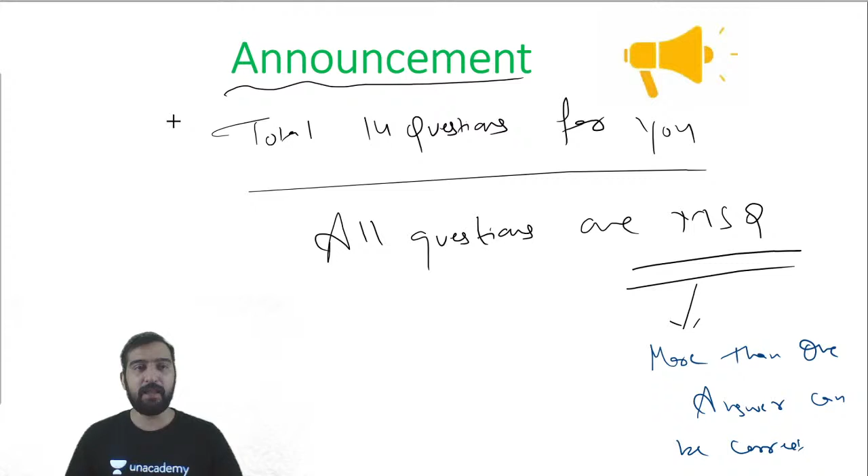All questions are MSQs. MSQ means in all the questions more than one answer can be correct. In fact minimum 1 answer will be correct, 2 can be correct, 3 can also be correct, even all 4 can be correct. So this is the concept of MSQ. What are the advantages of MSQ? No negative marking in GATE, no negative marking.

So these are our advantages. What are the disadvantages of MSQ? No partial marking, no partial marking. Suppose if in a question B and C are correct, and if you have ticked only B option, then my dear friend you will not get half of the allotted marks. You would be getting zero. No negative but no partial marking as well. So your concept must be very sound in order to attempt such questions.

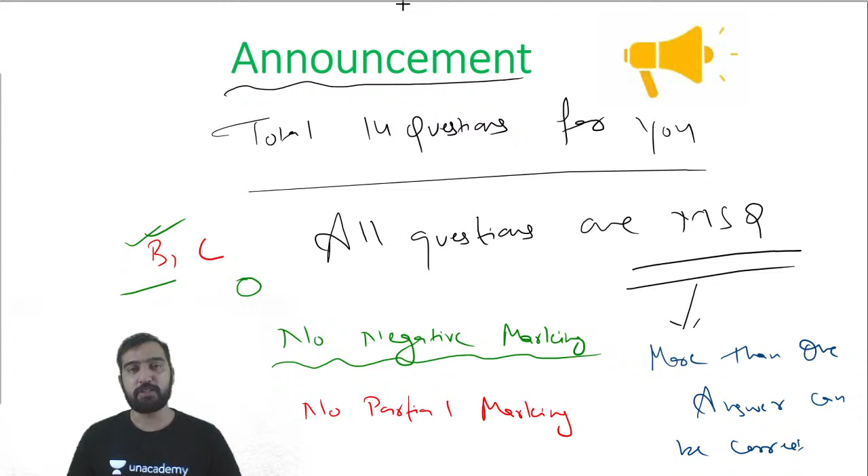So to practice this, I have come on the subject of RCC as well as strength of material. So my dear friend, welcome once again to the MSQ session on RCC and strength of material, and I think we should start the session now.

Only this much audience is there. Where are the others, my dear friend? Only 13, 2 less. Good morning Vamsi ji. So shall we start the session?

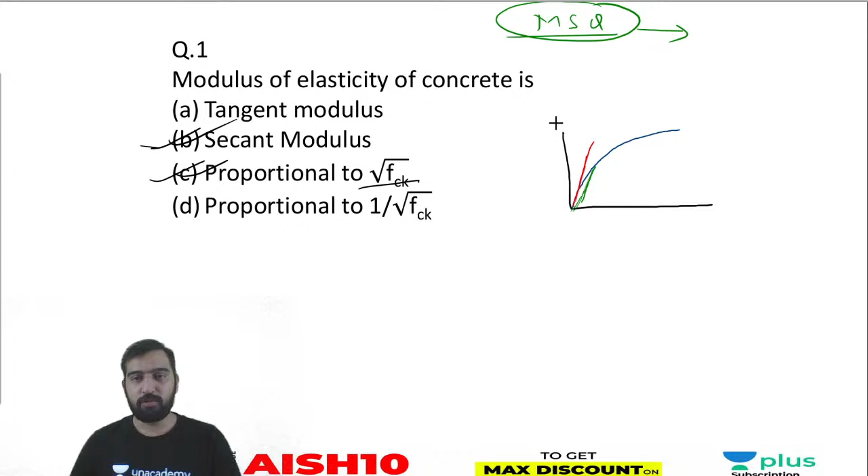So my dear friend, most of you are correct that the modulus of elasticity of the concrete depends upon the secant modulus and it is proportional to under root FCK. There are 4 types of moduli based on the stress strain curve - what are those? This is initial, this is secant, this is chord, and this is tangent. So out of these 4, IS code has taken secant modulus, and by considering the effect of creep and all, EC has been given as 5000 under root FCK. So IS code has taken secant modulus and EC is directly proportional to under root FCK. So both option B and option C are correct, my dear friend.

So now question number 2. Guys, for those who joined late, let me explain the rule again. These are MSQ questions, okay, more than one answer, more than one option can be correct. You will be getting the entire marks only if you have selected all the possible right answers. So keep this thing in mind and try to think positively for all the options. Read every option and judge whether it is correct or not. If this were an MCQ question, then I would also tick only the best one.

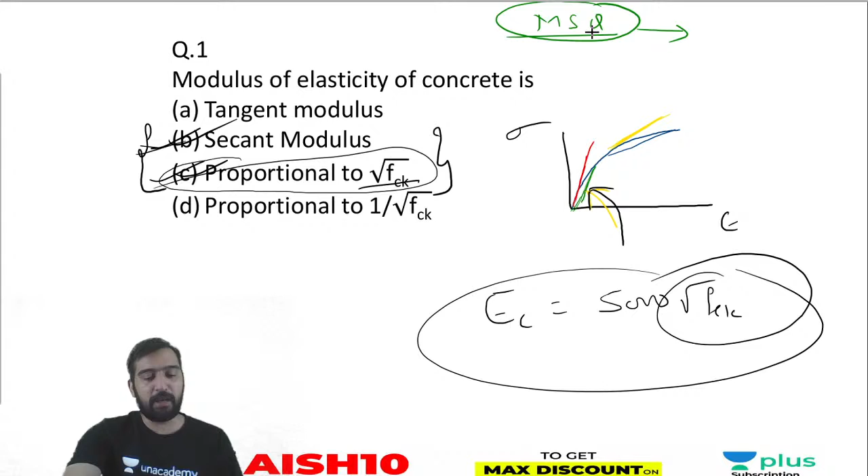Okay, not an issue. Next is question number 2 on your screen, my dear friend. So which of the following statement is or are correct? Tell me. The limit state of collapse is defined as the acceptable limit of stresses in the material. The limit state is one that ensures adequate factor of safety against collapse, and in limit state design method, actual stresses developed at collapse differ considerably from the theoretical value, and the fourth option is none of the above. Okay, so select the right one, my dear friends, select the right one.

So total 14 questions are there for two marks.

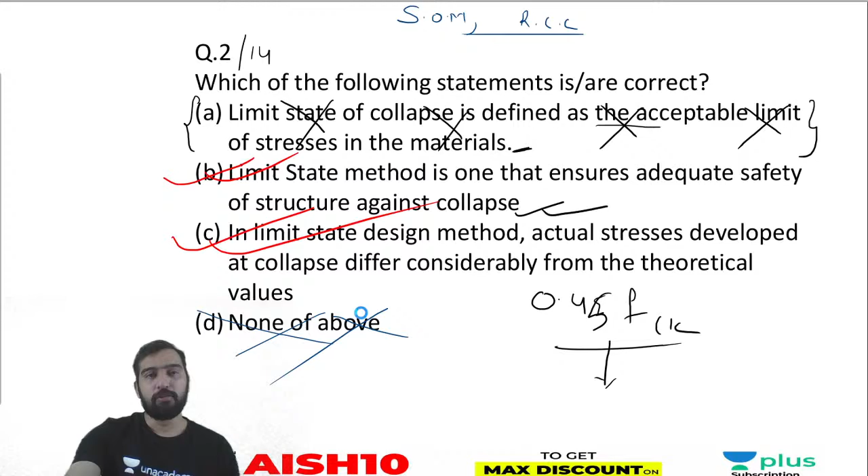Shubham, okay, so now here is question number 3. This is from strength of material. This question is from strength of material. So let me write here, question number 3.

Okay, this is an interesting question, from the very beautiful concept of strength of material, which is shear force diagram as well as bending moment diagram. So what all are the things which are correct here, that you have to tell me.

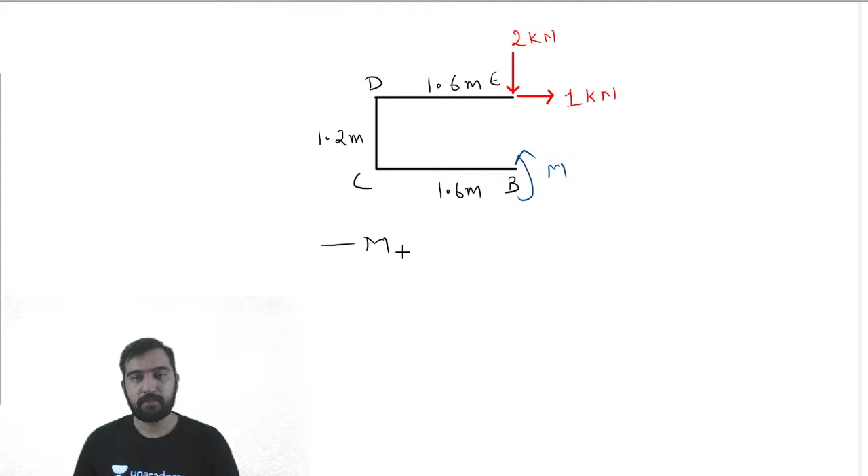EDCB. So minus M plus 2 into 0 plus 1 into 1.2 is equal to 0. So M is equal to 1.2.

It is not equal to 0. So this statement is incorrect. So bending moment at A is not equal to 0. In fact, it is equal to 1.2. Is it clear to all my dear friends?

Okay, next is maximum bending moment in AB portion is 1.2 kilonewton meter. Let's check that. So how we can find the value of maximum bending moment? That is important to know.

Now these three forces can be carried over to this support. So these three forces can be carried over to this support. And how to find these?

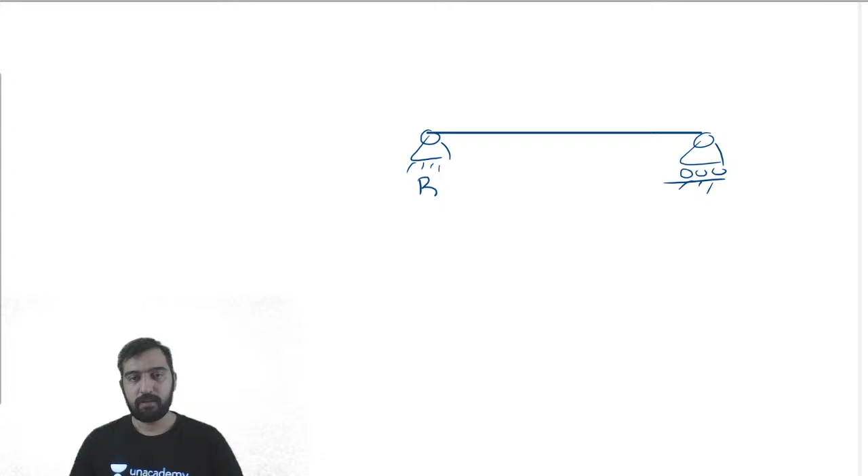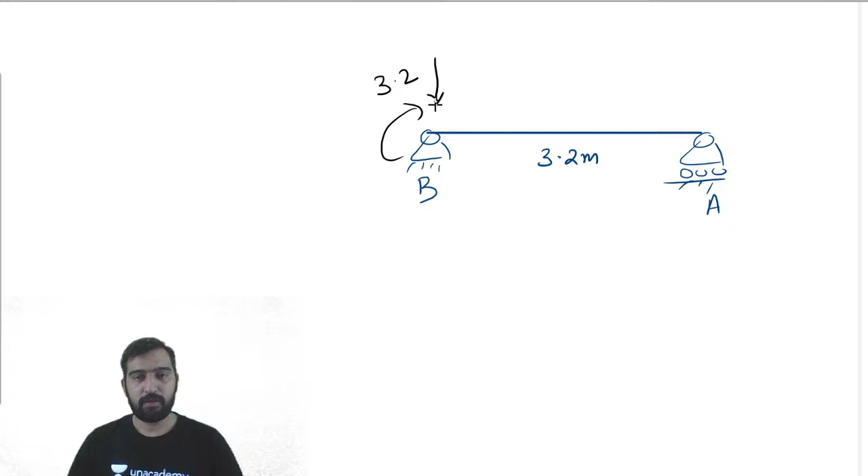This is anti-clockwise M. So carry over here would be 3.2. It would be 2 kilonewton. It would be 1 kilonewton. So if I want to write RA here, then RA is going to be equal to...

Surprisingly, no one even has attempted this question. I do not know the reason. Attempt toh karna chahiye tha na ye, ya mere comments update nahi ho rahe hain?

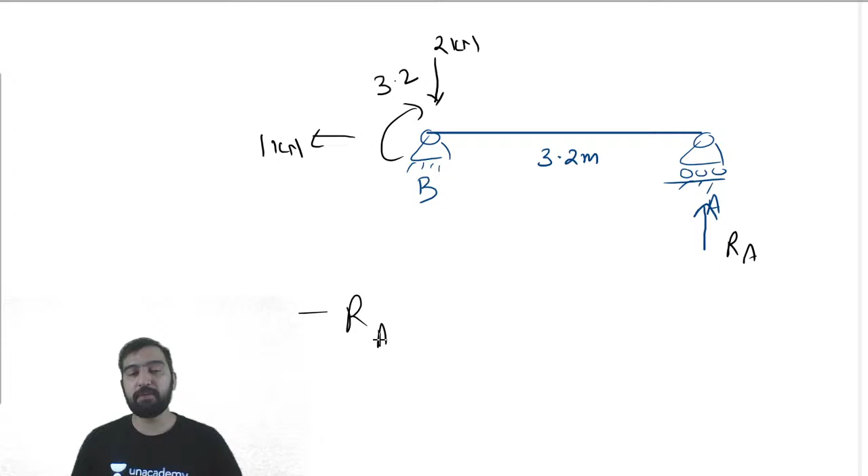So RA is 12/32, 6 by 16, 3/8. Haan na, 4 3 hamara 4 8 32, theek hai, 3/8. So this is 3/8. So 3/8 into 3.2 is how much? 1.2. So sahi baat hai.

Maximum possible bending moment in AB is 1.2. So this statement is also correct. C is also correct, theek hai.

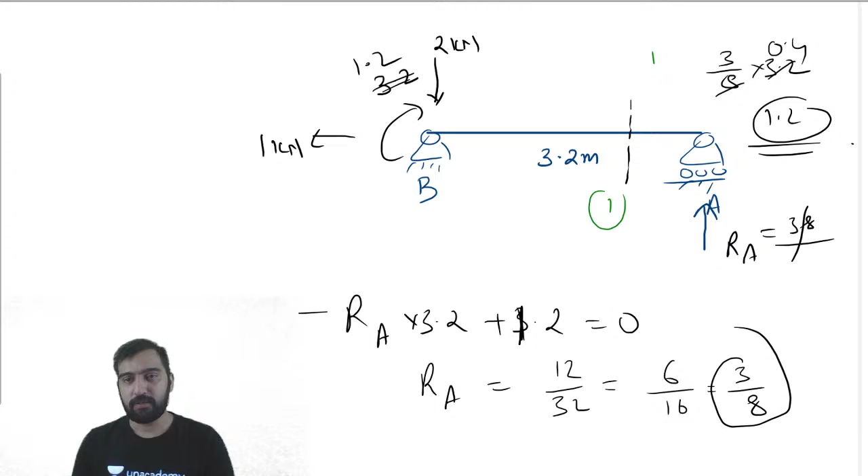The shear force in AB portion is constant and is equal to 0.375. Yes, you can see here, what is shear force here? Shear force here is constant and it is equal to 3/8.

So what about 3 by 8? 3 by 8 is I think 0.375. Okay, so 0.375 hi hota hai na, 3 8, 8 ya 24, na, 8 6 48 8 7 56.

Yes, 375 is correct. So option number A, C, D are correct and B option is not correct. Haan na, thoda bada question tha.

So please tell me my dear friends who all are agreeing with me. A, C, D - kaun kitne log agree kar rahe ho? Tell me my dear friends. A, C, D is the right answer. Okay. Chaliye.

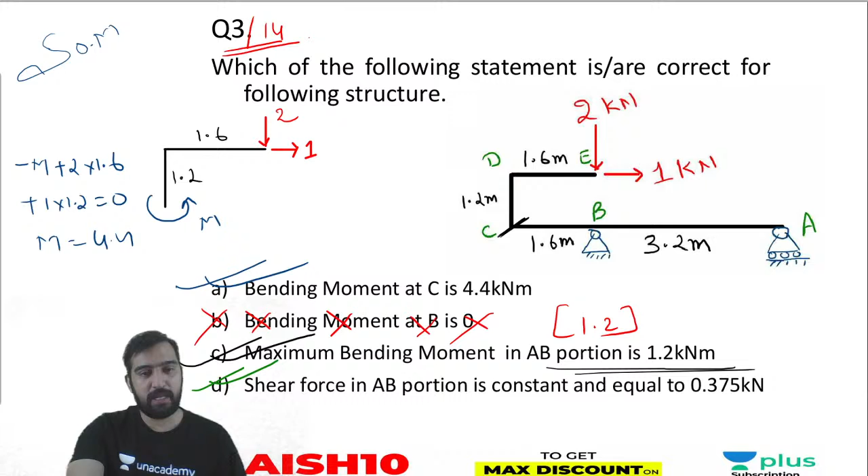So now the next one is question number. Okay, Shubham is saying A, C, D. Okay, Govind had said A, B, C. Unfortunately, that is wrong, my dear friend.

So now the next question on your screen. Question number 4 of 14. So which of the following statement is/are correct? It is again from the strength of materials. I hope it is easy to answer.

Shubham Tiwari is saying ADB. ABD, okay. What about others, my dear friend? Participation is not up to the mark. You are around 20 numbers and I am getting response only from 1 or 2. This is not acceptable, my dear friends. Interact nahi karoge toh kaise maza aayega?

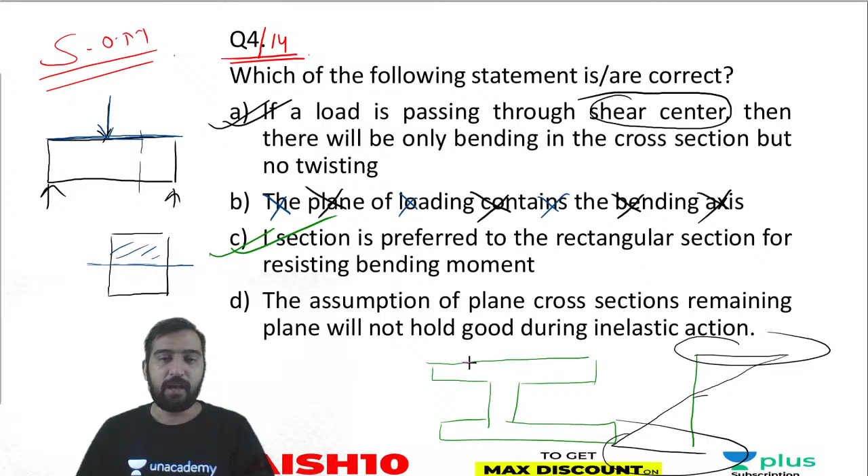My dear friend, I section, due to the wide flanges - as you all know, if we are drawing the bending stress diagram, bending stresses generally have extreme values at the outermost portions. So if outermost portions have wider availability of material, such a section would be very efficient in resisting bending moments. That is the reason why I sections are preferred more. Relatively, you are saving this much material here.

Although there are some challenges of shear stresses here, we can eliminate that by providing some stiffening girders etc. Okay, and the assumption that plane cross section remains plane will not hold during inelastic action - inelastic meaning plastic action.

This is again incorrect, my dear friend. Even in plastic analysis, we are assuming the same thing, that plane section before bending will remain plane after bending. So I tell my students that this assumption is not specific to SOM, RCC, or steel - it is an assumption of BTech civil. Throughout BTech civil, this theory will always remain valid, that plane section before bending will remain plane after bending. It means the strain diagram is going to be linear.

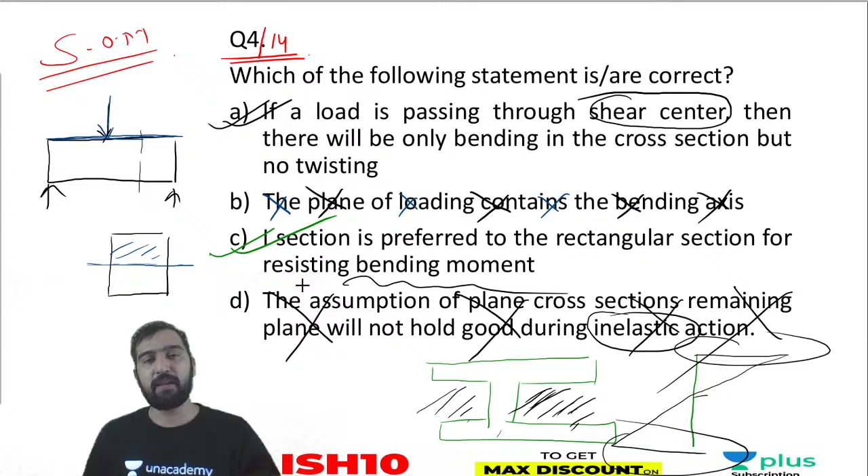Okay, so now question number 5 of 14.

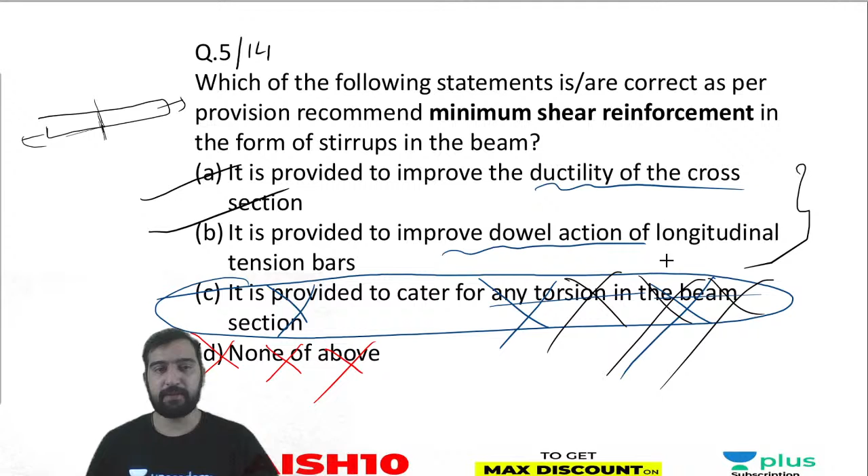Now next, question number 6 out of 14.

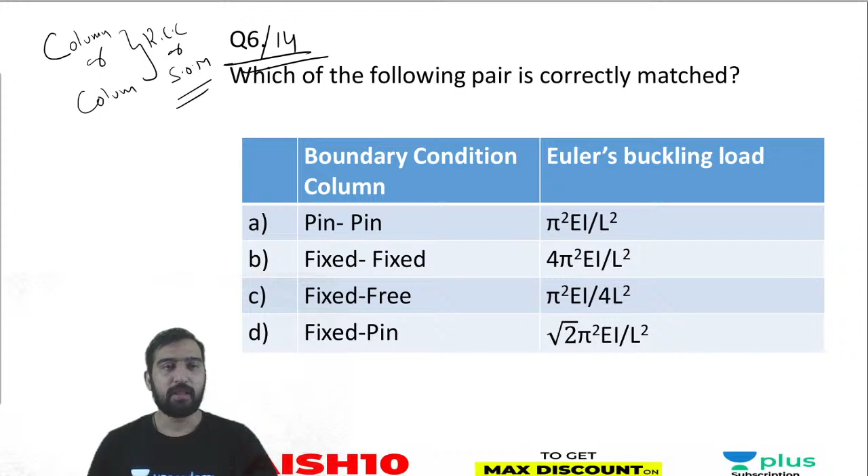Okay Rahul, take it. So which of the following pair is correctly matched? You can consider either RCC column or column from Strength of Materials - whatever you like. But I would prefer to keep it under Strength of Materials, since that would be more basic. So you have to tell which pairs are correctly matched: A, B, C.

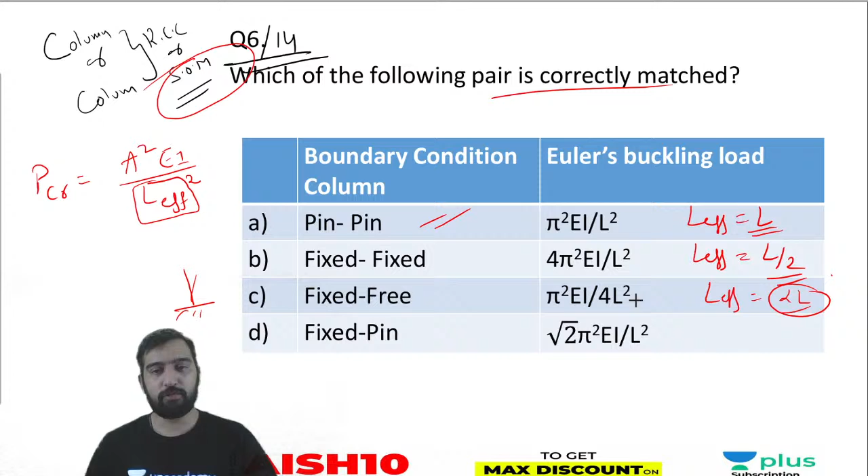Fix-pin - here L effective is your L/√2. But my dear friend, the ambiguity is here.

For L/√2 to be valid, there must be a 2 in the numerator - if it were 2 pi square EI upon L square, then you could write it as pi square EI upon L/√2 whole square. You could write it that way. But it is already √2, so this root is simply there to confuse you guys. So this is incorrect.

So all these three remaining are correct. So Rahul, Shivam and Bharat Mishra are right for these questions, my dear friend. Okay, now question number 7.

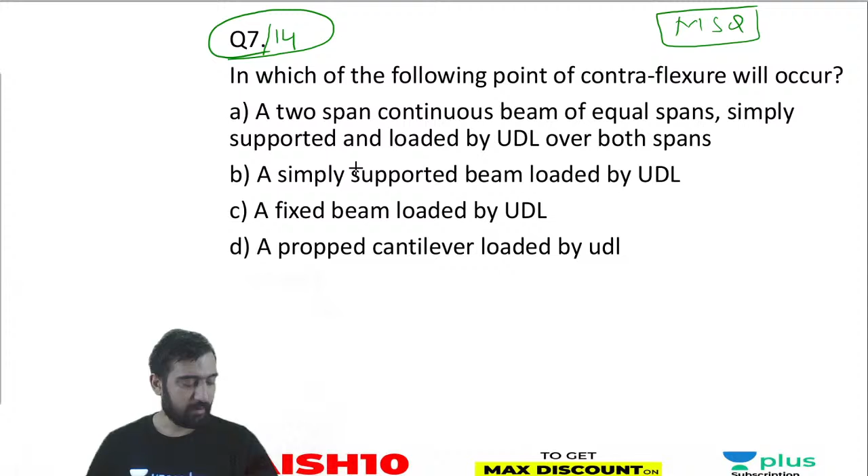Okay, so far one of you is correct. Yes, Ajay Khatri. Yes, my dear friend, Ajay Khatri is right so far. ACD is the right one.

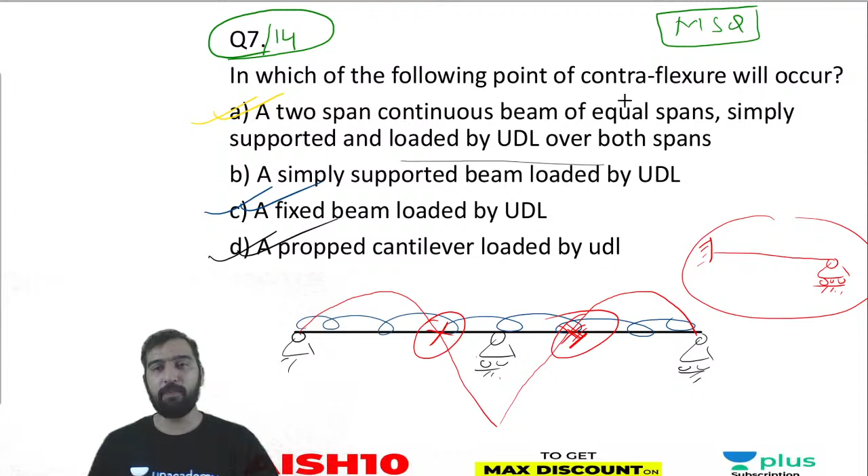Ankur Aman is saying BAD. No Ankur, if you said CAD it would sound better. So there are two points of contraflexure. I can see one here and one here. So in which of the following does the point of contraflexure occur? It is occurring in A.

Okay, a simple support beam loaded by UDL. If it's a simple support beam, my dear friend, contraflexure is the point where the bending moment changes sign. Do not think that zero is simply equal to contraflexure. Here this is not contraflexure, this is not contraflexure.

Contraflexure means the member goes from sagging to hogging or hogging to sagging. So they are positive and negative, negative and positive. So two changes you can see here over this span. So two contraflexures are here, zero contraflexures are here.

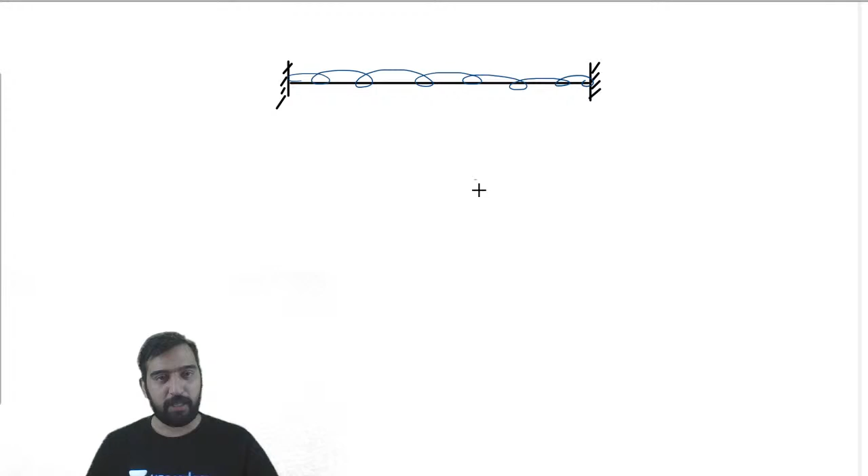Now if a fixed beam is loaded with UDL, in that case what can you do? Please do not be confused by the names. Fixed means by default it is a fixed beam. Propped cantilever beams by default have one side fixed and another hinged. Cantilever beam by default means one end is fixed and the other is free. So if you are going to draw the bending moment diagram here, my dear friend, you have to plot it like this.

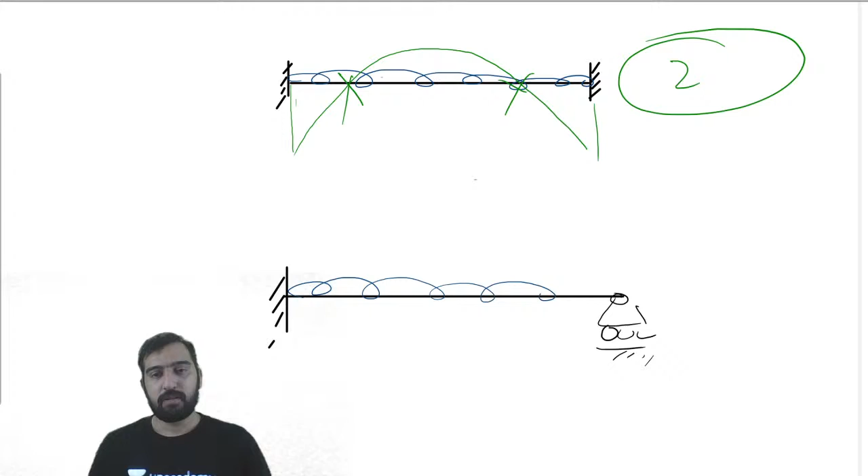So here as well you can see two contraflexures are there. And even if you are talking about a propped cantilever beam, which is again loaded with UDL, then it is going to have one contraflexure, like this. One contraflexure. But simple supports are the support which does not have any contraflexure.

So A, C, D - all three possibilities are correct. This one is incorrect. I hope it is clear to you guys. So this is about question number 7.

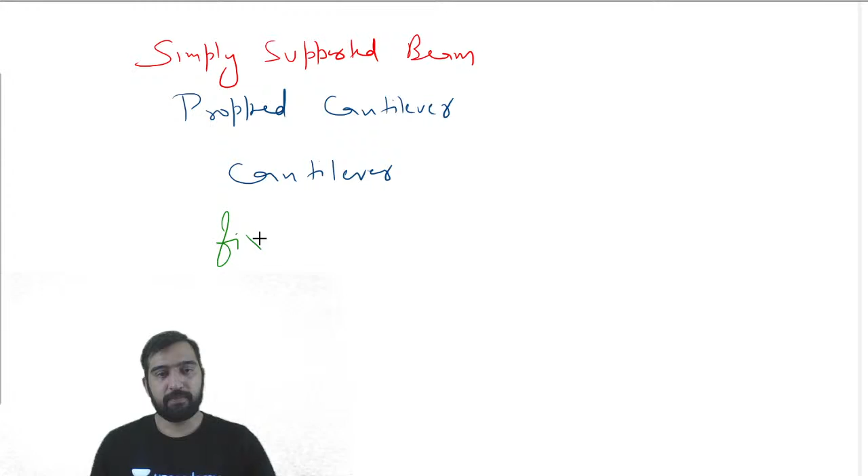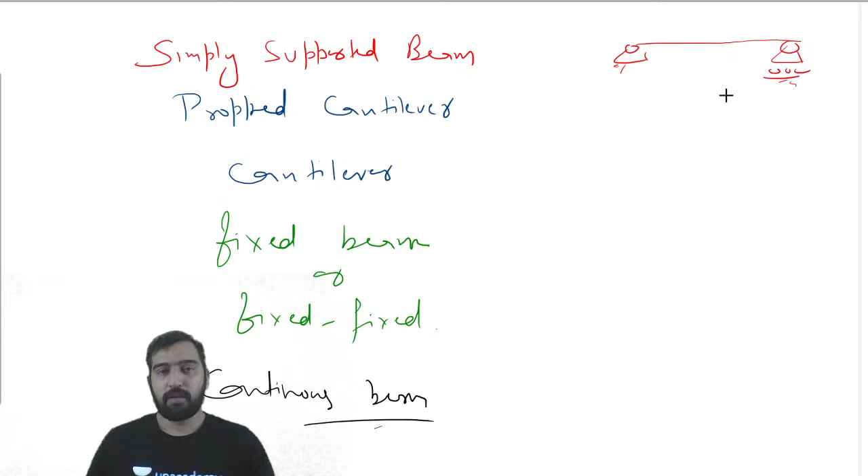Propped cantilever means one end is fixed and the other end is not free - it is propped, that is why it is called propped cantilever. Cantilever is like one chhajja, one end free. Fixed beam or fixed-fixed beam both have the same meaning, because this is cantilever, this is propped cantilever, this is simple support. So fixed beam means both sides are fixed, having fixity. Continuous means more than one span, like here.

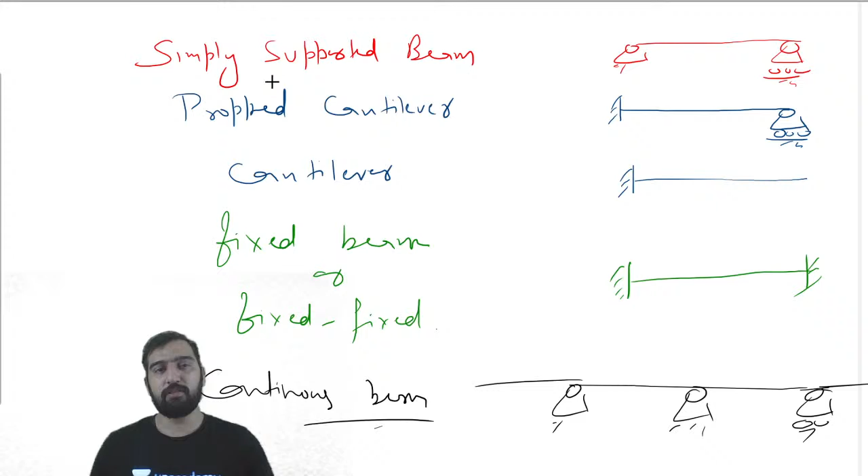And in these conditions, if it is continuous, it will go like that. Okay, so all these are the default meanings of these names, right? Tell me, I've expanded the structure topic fully on YouTube, and still you're having these doubts now?

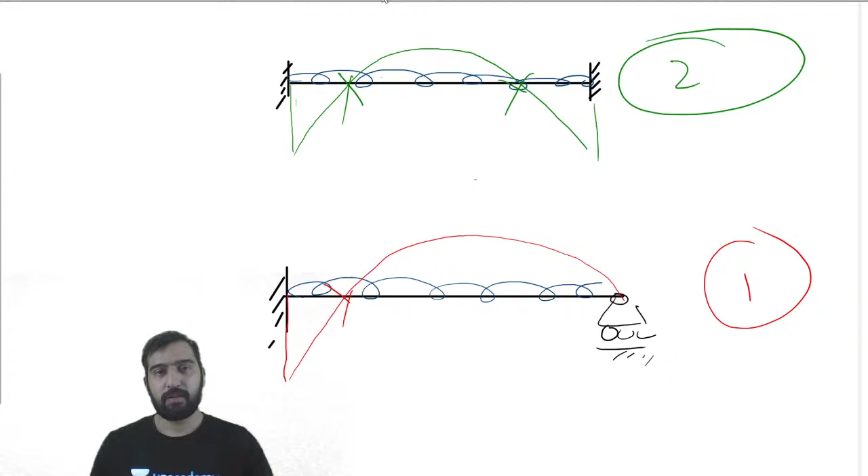Okay, so now question number 8, out of 14. It is from RCC. Yes. If it is overhanging on both sides, you have to call it an overhanging beam. You have to call it overhanging beam. Then you have to call it overhanging beam.

Okay, let's move to the next one. The bond between steel and concrete is mainly due to - is it mainly due to mechanical resistance, pure adhesive resistance, frictional resistance, or none of these?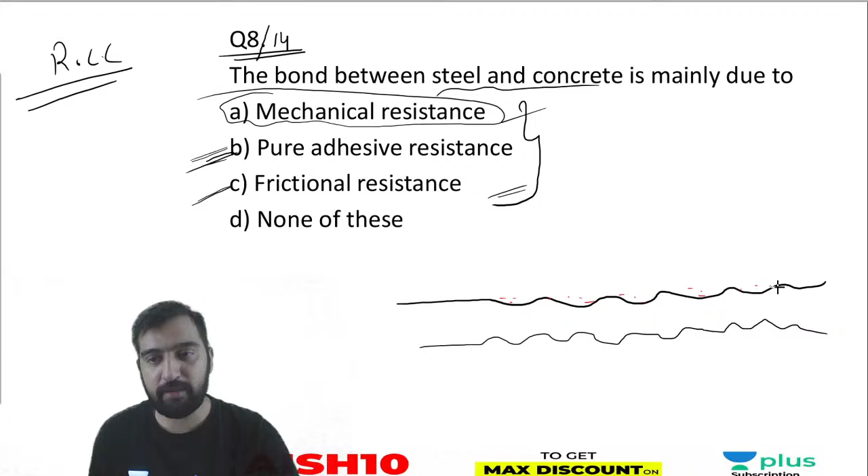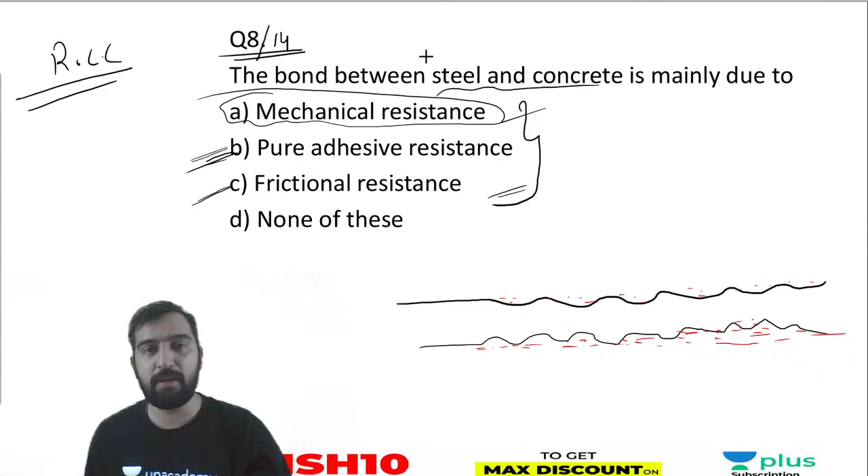Yes, mechanical resistance like in hooks. No, my dear friend, mechanical resistance is due to corrugation. Mechanical resistance, my dear Ajay, is due to corrugations. So see, whenever you are talking about HYSD bar, then you have to increase the bond strength by 60%, that is the reason. So due to these corrugations, my dear friend, what is actually happening - this ultimately helps in improving the mechanical resistance.

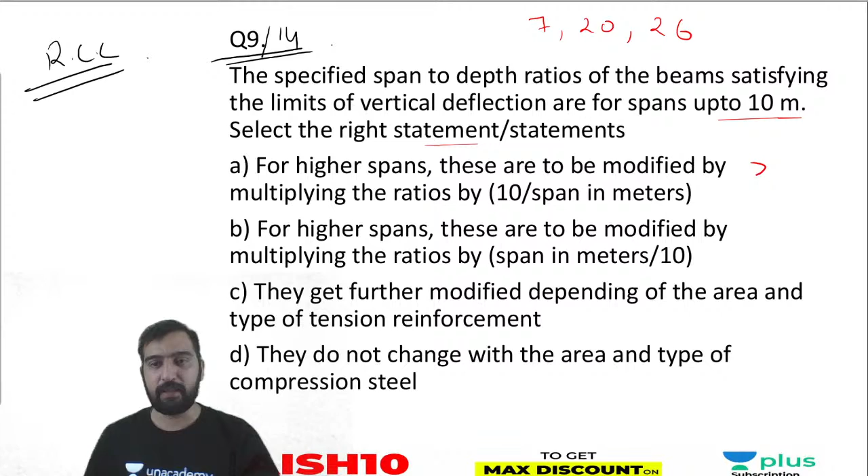Thanks Ajay. So for higher span these are to be modified by multiplying the ratio by 10 by span in meter, right. If my span is greater than 10 meter, in that case we have to multiply our ratio by 10 over span.

But yes, one thing is there - if span is greater than 10 meter, then cantilever beams are not allowed. But in case of simply supported beam or continuous beam, you can modify your span ratio by multiplying it by 10 over span. So if this is correct, this cannot be correct.

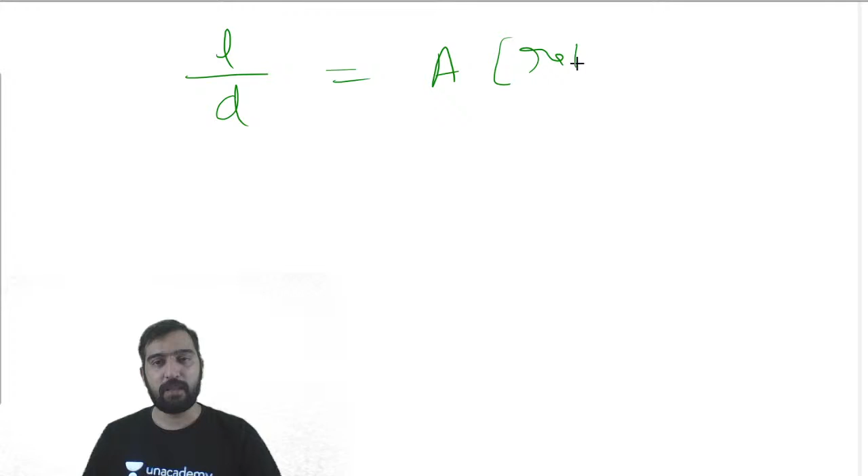Look, with common sense you can figure this out. Like I'm telling you that L over D, let's say A - length of the span, or you can say effective span, it is nothing but this ratio A. So let me take the example of SSB, simply supported beam. If it is simply supported beam, then it is going to be 20, my dear friend.

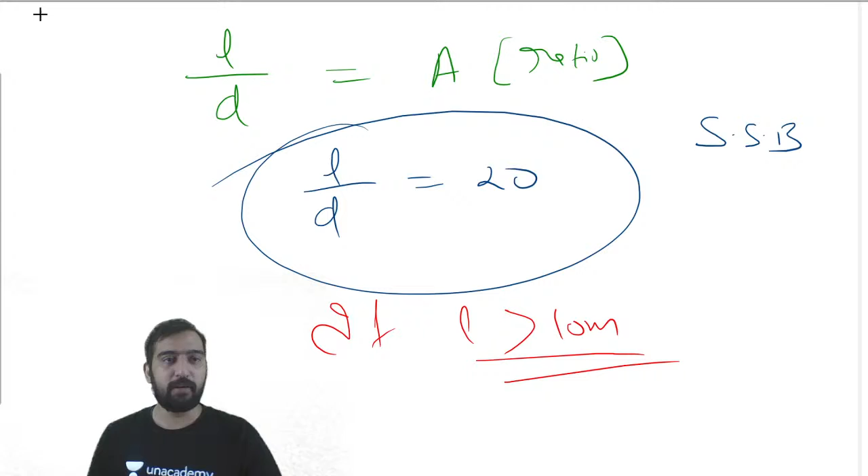But if my span is greater than, if my L is greater than 10 meter, just think with common sense that if D is equal to L by 20, so if L is greater than 10 meter, then what do you think - will you be needing more amount of D or not? Yes, obviously. If length of the simply supported beam is greater than 10 meter, then huge amount of bending moment is going to generate, because bending moment is a function of length of the span. So if it is greater than 10 meter, then the depth of the cross section must be increased.

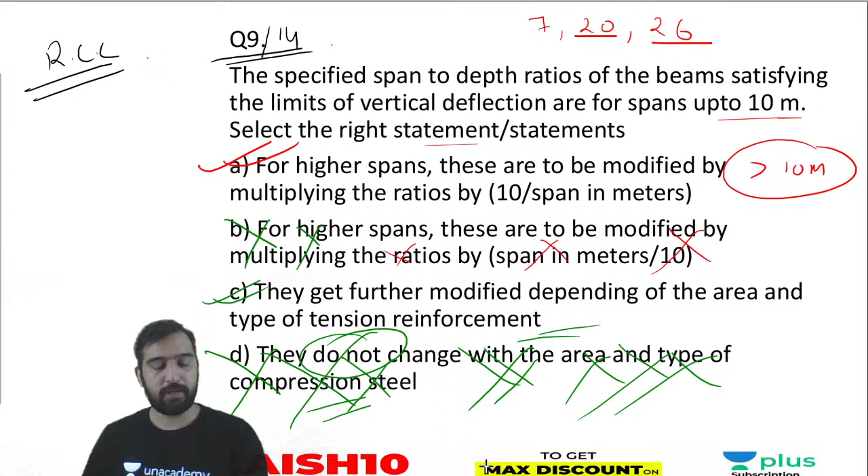Alright, now the 10th question. Tenth question out of 14.

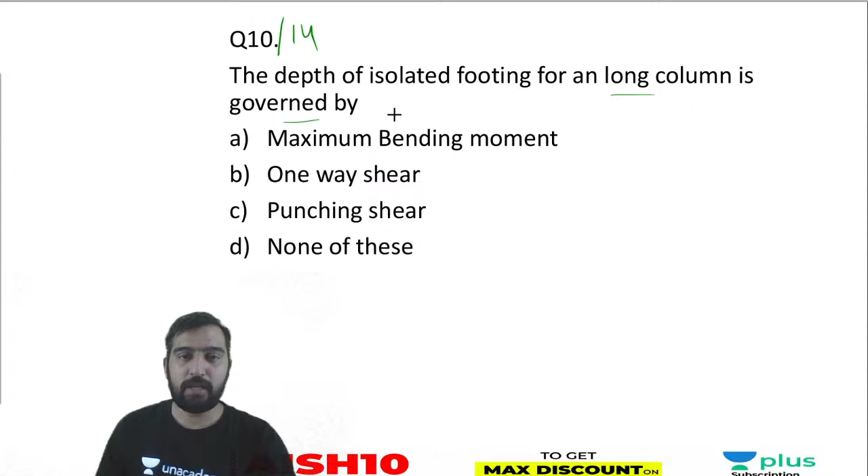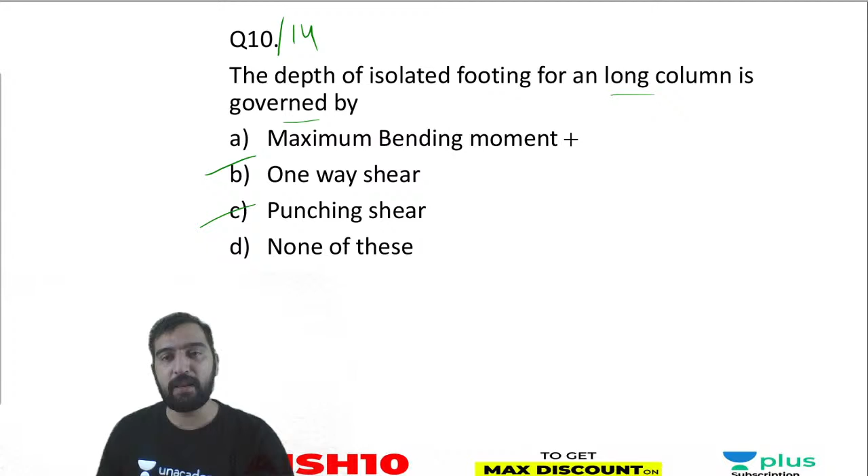Generally, you can say, first of all, you are calculating depth based on the bending moment, then you are modifying it for one-way shear, then you are modifying it for two-way shear. But I am not considering here the maximum bending moment, because in footing, you are not providing a dedicated shear reinforcement.

You are not providing a dedicated shear reinforcement. So entire design for shear is to be checked based on the thickness. So increasing thickness is the only criteria, the only way to prevent my footing from shear failure. That is why I am only going to keep shear components under the governing criteria.

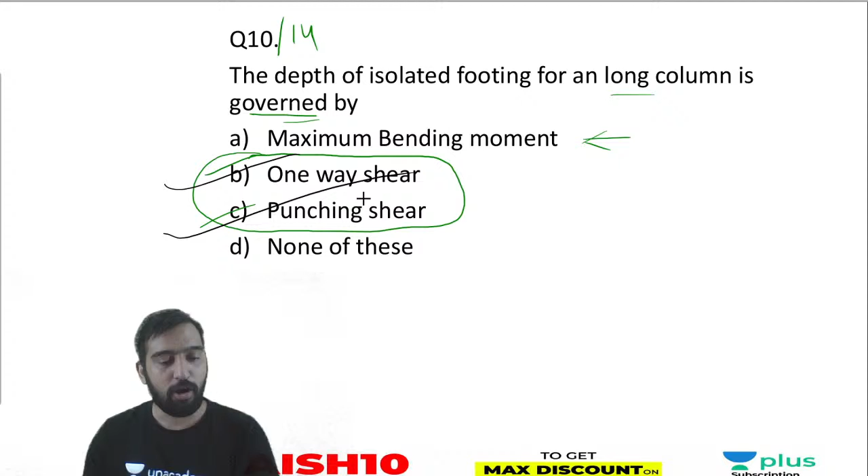So option B and C both are correct, my dear friend. Ankur ji is saying ABC.

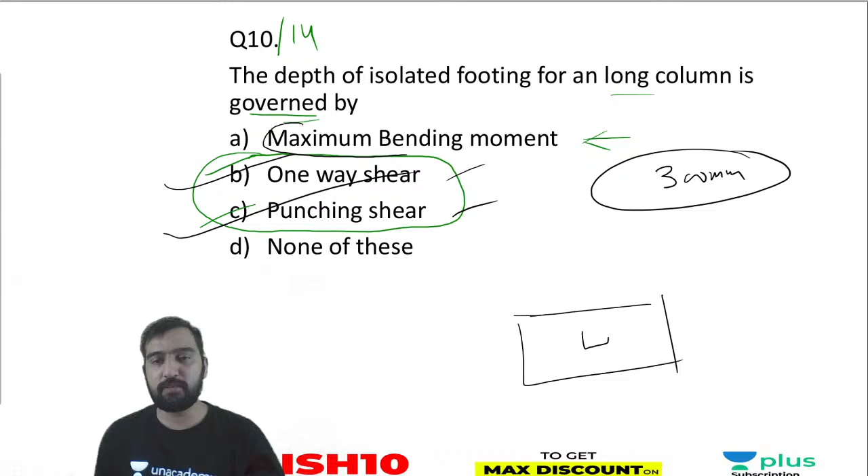So by that you can control the depth, but you do not have any provision to provide shear stirrups in the footing. That is why it is very important to pass the one way and two way shear criteria while deciding the depth of the isolated footing. Two way shear means it fails in both directions, it is simply your punching shear. This is one way shearing and this is two way shearing. The critical section for one way shearing is located at a distance D. Critical section for two way shear is located at a distance of D by 2 and D by 2. The critical section for bending moment is located at the face of the column. So punching shear and two way shear are same, and this red one is two way shear.

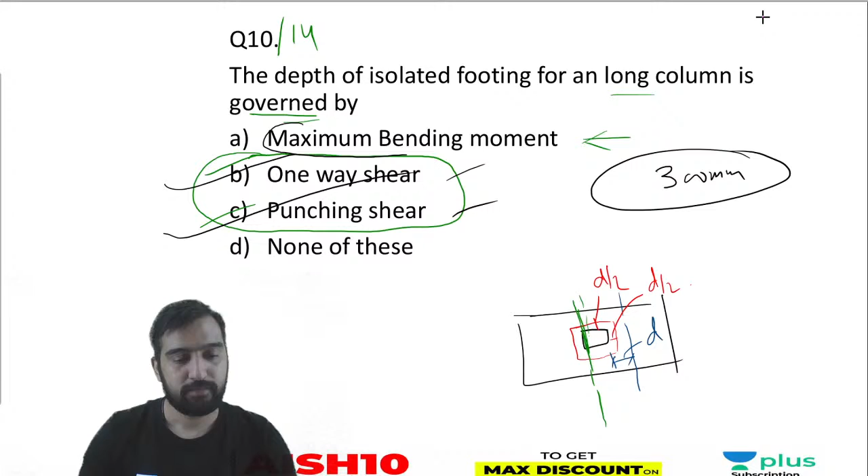Okay, next is question number 11 of 14. This is again from strength of material.

Shashi bhai is giving some suggestion, I think it is for Ajay, that one tan alpha formula is there. So question 11, I have written question 11, I have already written there.

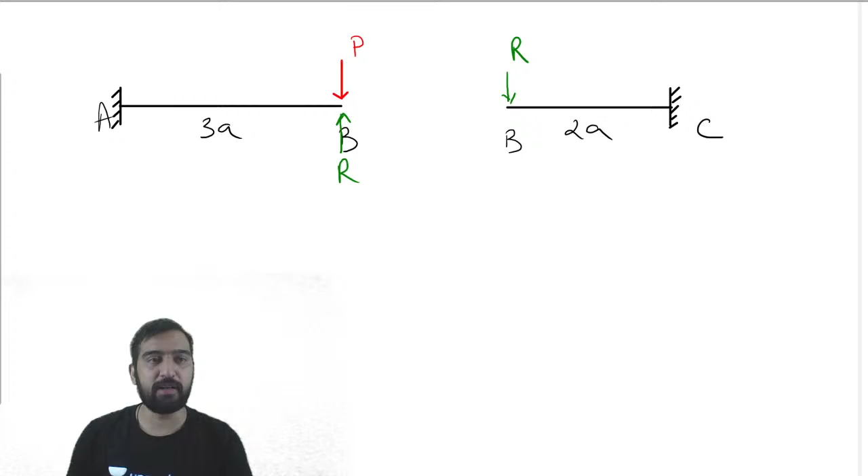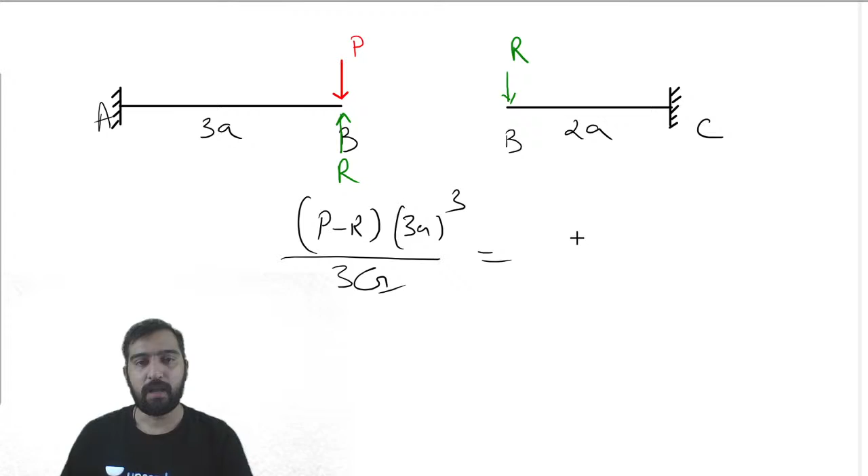Yes. So here you can compare the deflection at B. That is going to be same because they are part of the same beam only. So deflection at B in the left beam is P minus R, 3A cube upon 3EI, and it is R, 2A cube upon 3EI. Okay, so this and this will get cancelled.

So you cancel A cube here, and it becomes P minus R into 27, 9, or 27 is equal to 8 times of R. So 27 plus 8, 35. So 35R is equal to 27P. So R is known to you.

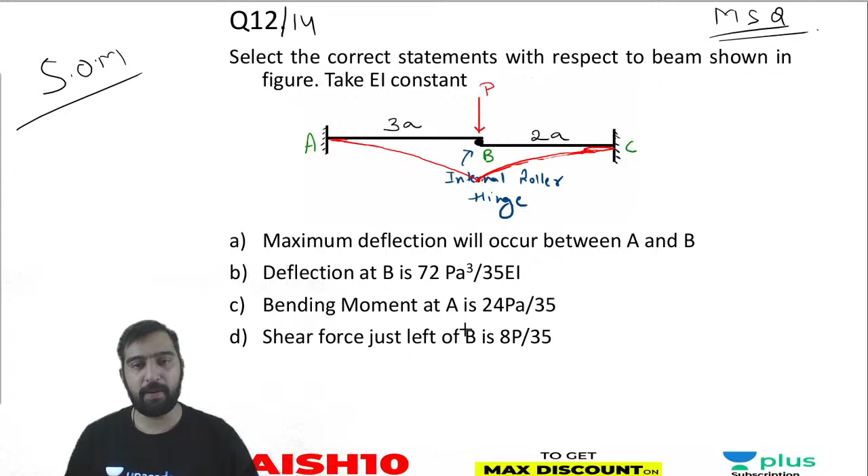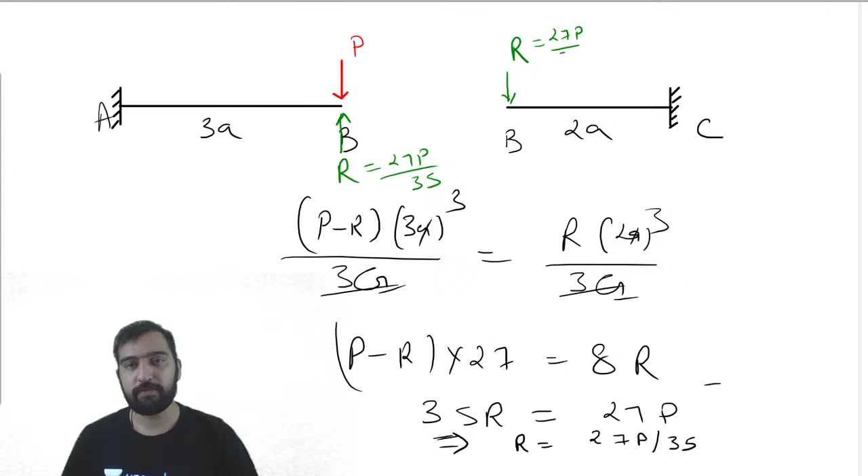So now this is 27P by 35, and this is as well 27P by 35. So what is this? This is P minus R, which is how much? It is P minus 27P by 35, so it comes out to 8P by 35. So 8P by 35 into 3 is 24PA upon 35. So this is correct.

This is correct. And what about shear force at left of B? Shear force at left of B is equal to P minus R, which is 8P by 35. And if shear force was asked at right, how much would it be? 27P by 35. This is correct.

Now what about deflection at B? So deflection at B, my dear friend, you can find it from here. So it is R L cube, 2A cube, so 8A cube upon 3EI.

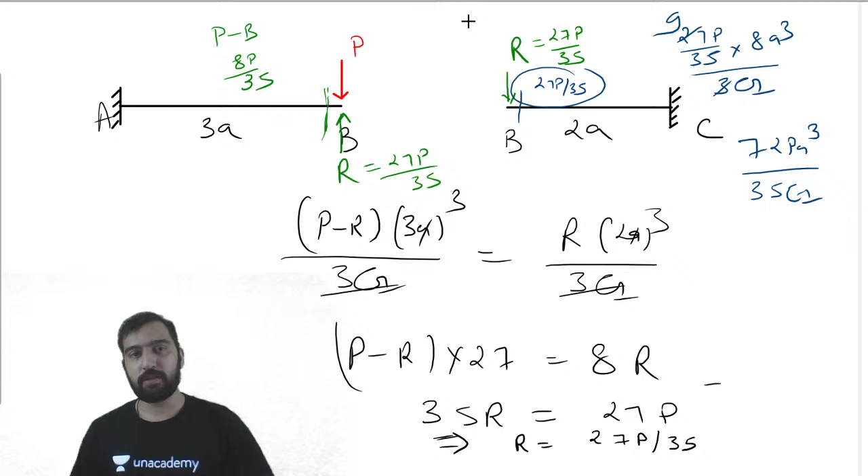Okay, so I think this is also justified. Option B is also correct. So B, C, D, all these three options are right options here, my dear friend. Okay, so good attempt, my dear friends.

Muhammad Majid is the one who has given it correct. Okay, Ajay was also very, very close. So now the second last question of this session, my dear friend, and this is from pre-stressed concrete. So second last question from RCC.

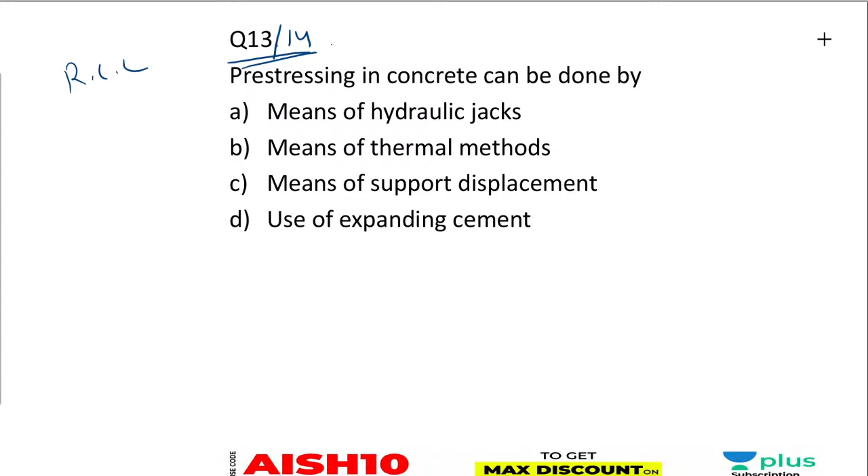Shivam is saying A, B, D. Ajay is saying A, B, C, D.

My dear friend, ये याद ही कर लो। All these are the ways of pre-stressing। Pre-stressing hydraulic jack से भी होती है, थर्मल मेथड से भी होती है, सपोर्ट को हिलाकर भी होती है और एक्सपेंडिंग सीमेंट का यूज करते हुए भी होती है। So all four options are correct, है ना, all these four options are correct। Yes, so Ajay Khatri is right.

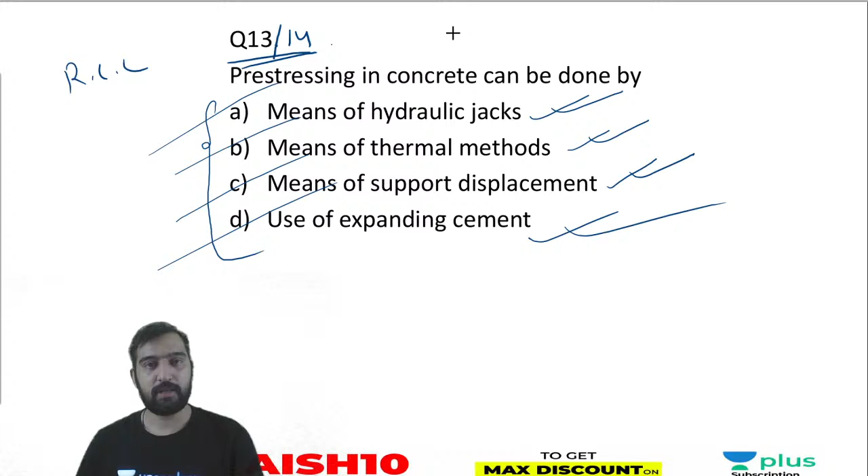चलिए, now the last question of the session, my dear friend. 14 by 14. It is again from the strength of material.

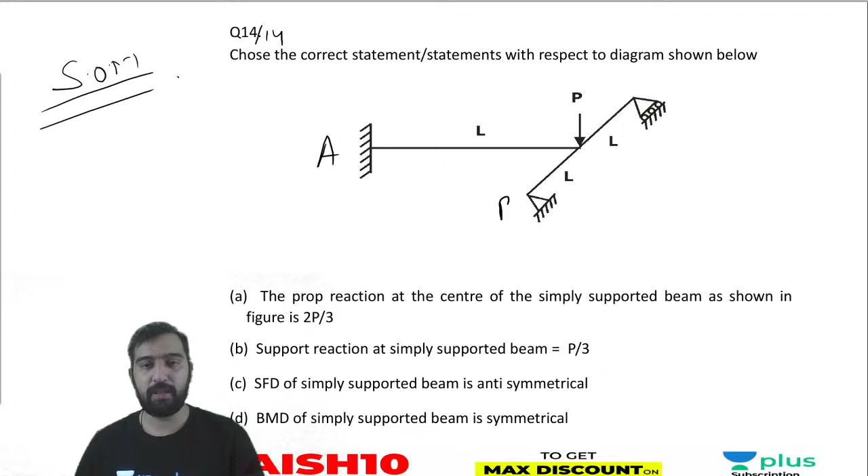So the problem, this is A, this is let's say B and this is C. Let's say the center, ऐसा कर लेते हैं, इसको C बोल देते हैं, इसको D बोल देते हैं, है ना। It is in 2 dimension। AC is like this and BD is like this। This end is fixed and B and D are simply supported। तो ऐसा ले लो।

ऐसा ले लो, ये हो गया आपका फिक्स बीम, और ये रखा हुआ है सिंपल सपोर्ट बीम के ऊपर। So this is simple support। My this middle finger and this thumb are simple support। So these are kept like this, and this is fixed support। Okay,

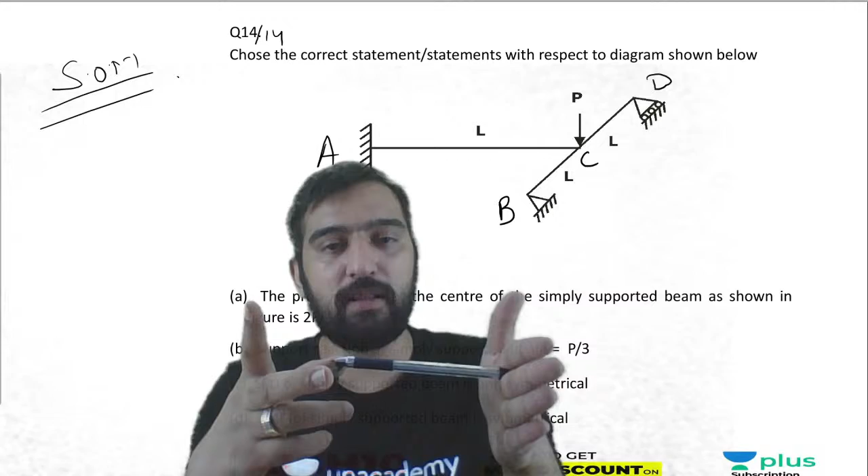like this। इसका लेंथ L है, इसका लेंथ L और L, तो टोटल लेंथ 2L। So it is actually meeting at the center। Is it clear now? ये सिंपल सपोर्ट मेरी उंगली और मेरा अंगूठा। ठीक है, so solve it.

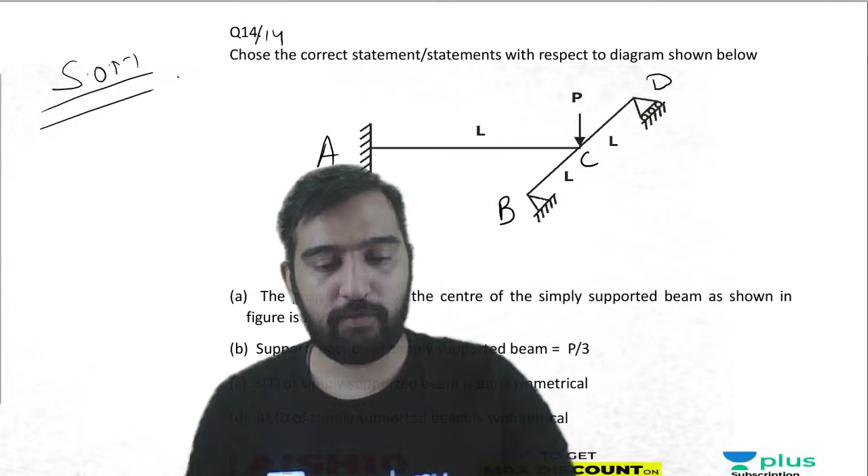Question number 14. Question number 14. Okay, tell me. किंगराज ने जो आंसर दिया है, is that for 13 and 14? किंगराज, is it for 13 and 14? Tell me.

Okay, सेम उसी कंसेप्ट से करेंगे जैसे मैंने पहले बताया था। What I am going to do here at C junction, I can consider the reaction given by BD to AC, and the same action from AC will be given to BD in the downward direction। Okay, so let me just make the free body diagram। So what is going to happen here?

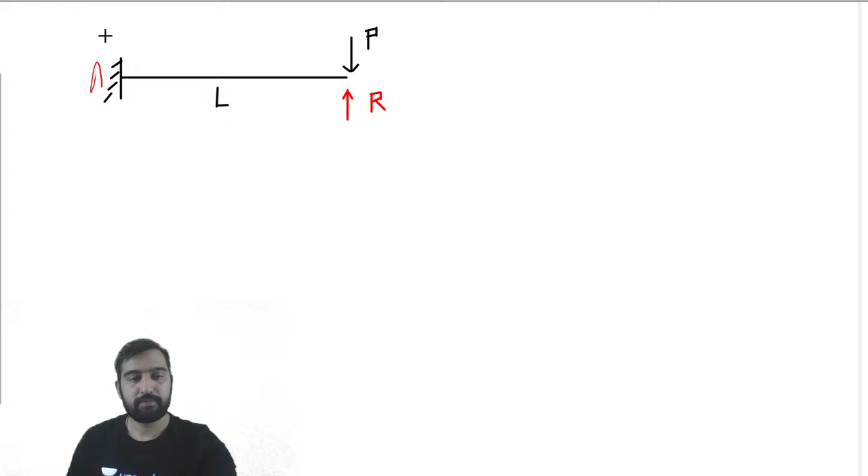ACD, ACD बोल रहे हैं। So P, this is L, P। Okay, and here you are getting R। A as well as B, A and C, and next it is like this, ऐसे ही बना लेता हूँ, इसी के नीचे बना लेता हूँ। 2L है ना ये, so R would be acting here, और ये सपोर्ट्स हैं like this।

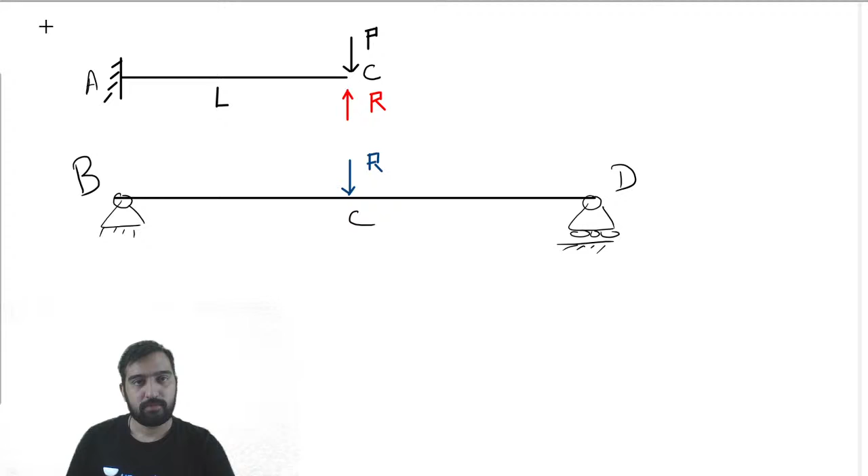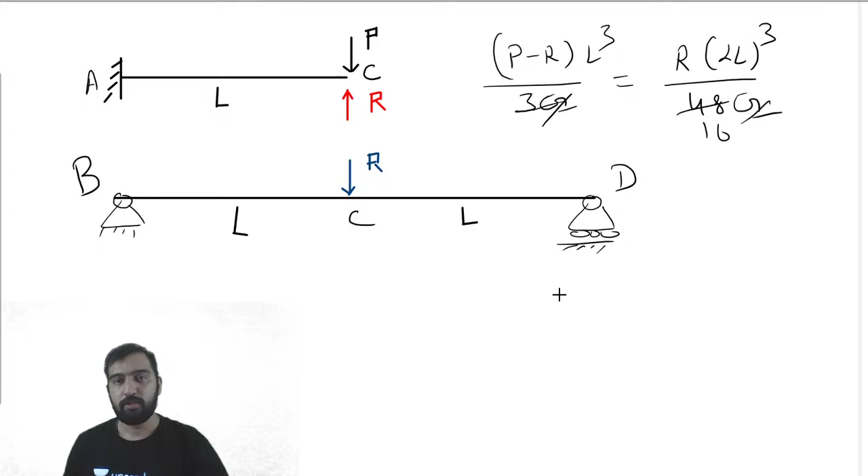Okay, so again you can consider here the deflection। So deflection at C here is simply P minus R, L cube upon 3EI। So deflection at C here would be R 2L cube upon 48EI, WL cube upon 48EI। So compare these, ये हो जाएगा 16, ये हो जाएगा 8 बटे 16 R by 2। So P minus R is simply equal to R by 2। तो P हो जाएगा मेरे पास 3R by 2, तो R हो जाएगा मेरे पास 2P by 3।

So this reaction is 2P/3। So this will also be equal to 2P/3। This will be equal to P/3 and P/3। Okay, so this is also P/3। So here the bending moment would be PL/3। और क्या पूछा है सब निकाल दो। Bending moment diagram would be like this,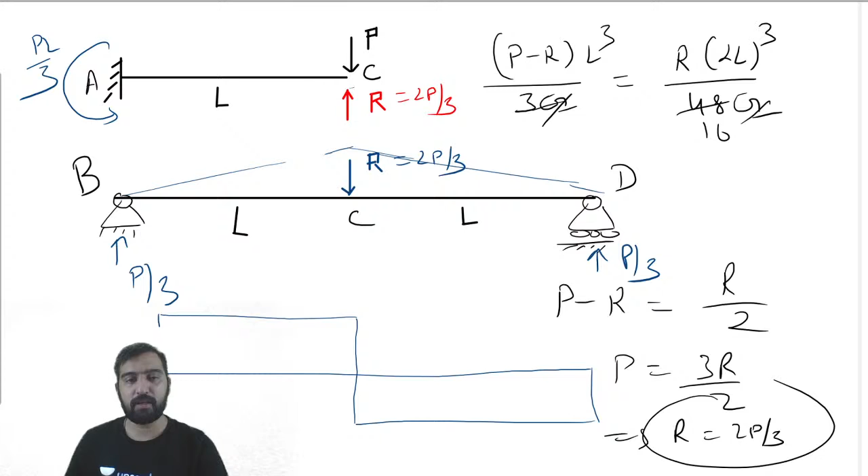symmetrical। So the support reaction at the center of the simple support given in the figure is 2P/3, correct? Support reaction at simple support is P/3, correct - it is 2P/3, P/3 and P/3। SFD of simple supported beam is anti-symmetrical। इसका अगर आप SFD बनाओगे तो कैसा बनेगा? It would be like this, yes, it is anti-symmetrical, and BMD is symmetrical। So all four options are right, my dear friend, so Ajay Khatri is once again all right.

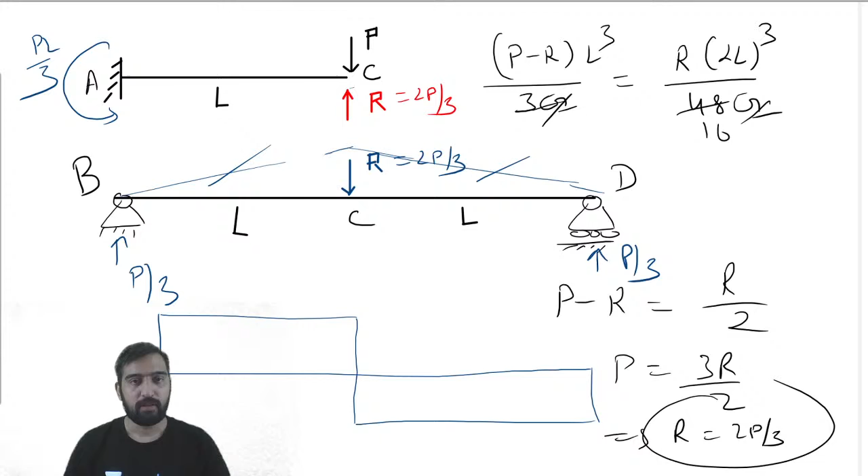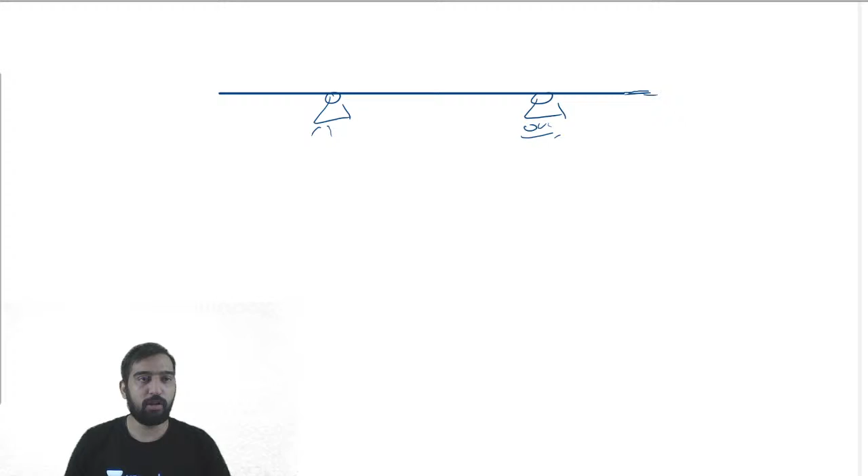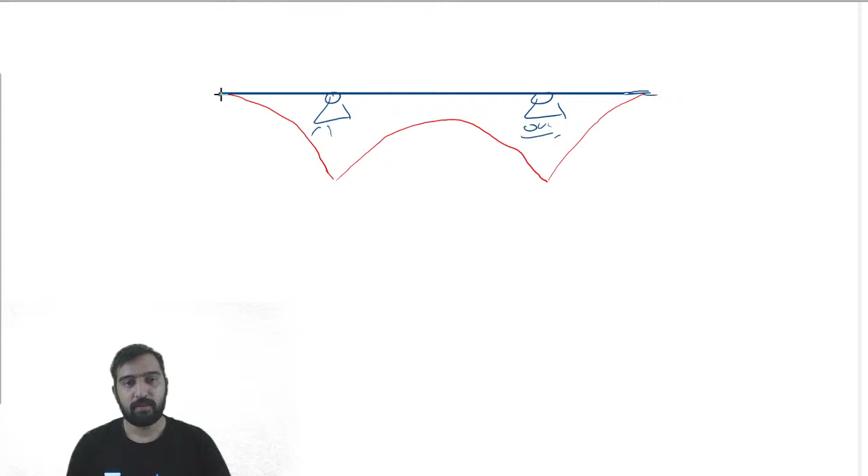Like this, if it is UDL, then iska jo diagram hoga, it can have all the three possibilities. It may be like this, possibility 1. It may be like this, possibility 2. Or it may be like this, possibility 3.

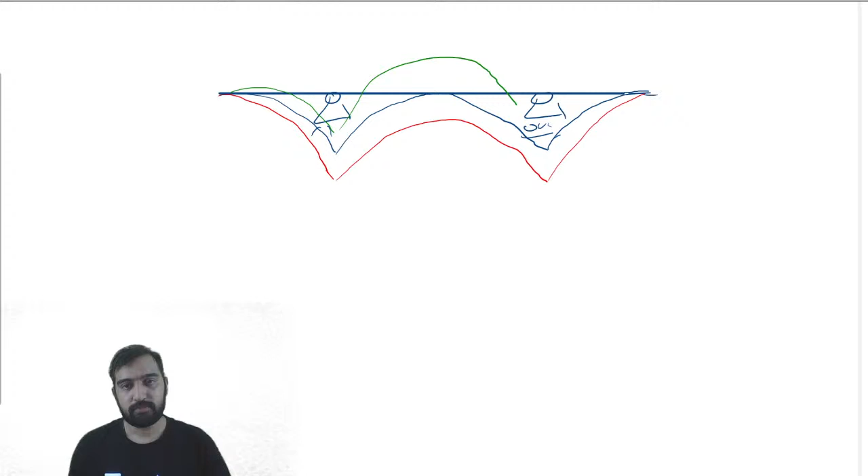So here it can have two contraflexors, here no contraflexor, here no contraflexor. Okay, so it depends upon A and L ratio.

Ye aap nikalte bhi ho SOM mein ki what should be this ratio, isn't it? So you can calculate accordingly. Jo bhi aata hai aapka A/L ratio, L/4, L/3, wo you can calculate there.

Okay, so it is a function of A and span ratio, my dear friend. Is it clear, Rahul?